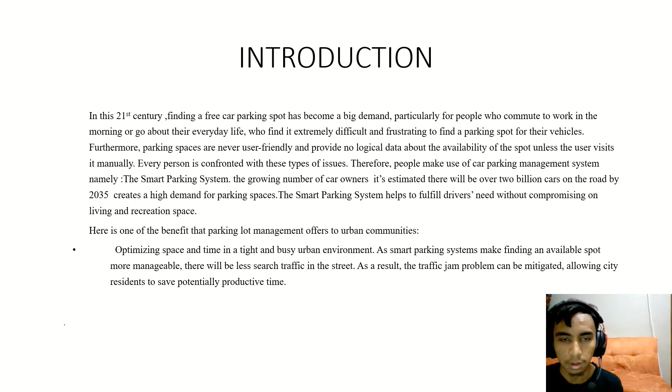Here is one of the benefits our parking system offers to urban communities. Firstly, optimizing space and time in a tight and busy urban environment. As a result, traffic jam problems can be mitigated, allowing city residents to save potentially productive time. This benefit helps reduce their time spent finding a parking spot, allowing them to save time getting to work early in the morning or at night.

For the next session, I will present our objectives for this project. Our first objective is to make the car parking system more efficient, as vehicle travel time and search time are significantly reduced due to the information provided by the smart parking system. Basically, the car parking system will alert and notify the user by providing information about free parking slots, making it easier for them to find one. This makes the system more efficient.

The second objective is to reduce manpower at the parking lot, so the parking can operate automatically while saving on manpower and energy use. Nowadays, most car parking lots are operated by people, which becomes a big problem as the parking lot consumes a lot of their time and energy. I believe with our project, the parking can operate more efficiently, reducing energy usage significantly.

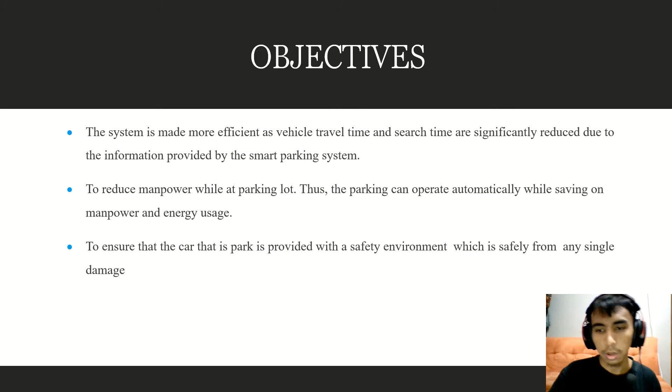The next thing I will share with you is the list of equipment. To implement this project, we need 2 proximity sensors, 2 barrier gates, and 2 light signs. For the next presentation, my friends Fawaz and Zulkarnain will explain a little more about our project.

Okay, next we go to safety in car parking. First, provide signboards in the parking area that guide users so that the flow of vehicles is orderly. With these signboards, traffic inside the car park becomes more systematic.

Next, make parking boxes with the proper size and distance, taking into account the distance between cars to facilitate the movement of users passing through on foot. This means providing proper parking boxes to give users a path to escape during an emergency.

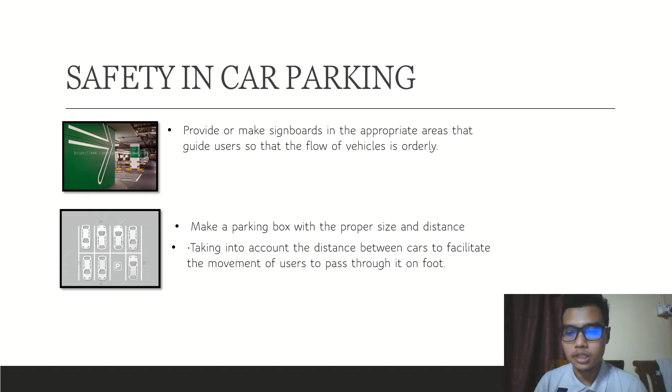Next, provide a strict security control system such as installing CCTV to monitor the level of security in the parking area, and make periodic monitoring of the security system. This is to provide strict security control in the car park area to prevent theft and other incidents.

Okay next, a technician should always be in the area when the system is operating. Provide an emergency button on the system to alert the technician for help so unwanted things don't happen. Provide fire equipment so that a fire disaster can be controlled immediately. This part is very important because it can save users' lives. A fire extinguisher is needed so users can control the fire first before waiting for help from the fire brigade, to prevent an explosion resulting from a car fire in the parking area.

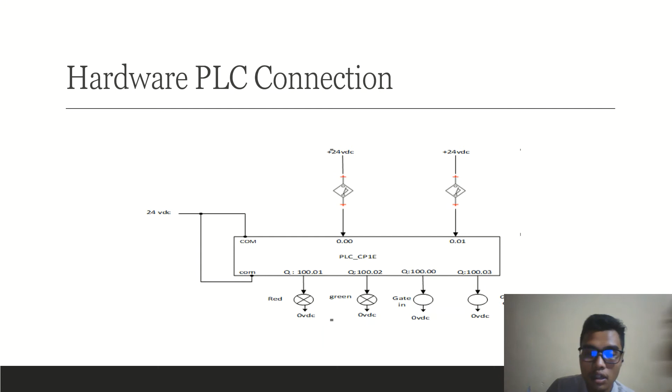My number matric is CN190048. Today I want to show how to run the simulation by using CX Programmer version 9.6.

Okay, so for our ladder diagram, before I run it, I just want to show the system that we built. This is sensor in for the car entry, and this is diff up.

Diff up shows that when the sensor is triggered, it will give a pulse and go to the increment. The increment we use is plus increment, which will add one each time, and this is our output that will be used as a gate. So when sensor in is triggered, the pulse will be given, the device will be active, and the gate will open.

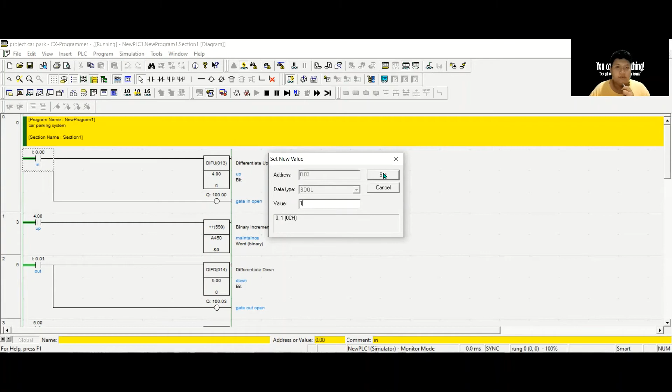Okay, so I give one, one for active high. I get active high for one. So the line shown in green is green. That means the voltage is true to the diff up and gives a pulse to the binary.

So when the car enters, the binary will count up one, from 0 to 1. So the gate is open. After the car passes through the sensor, it will be active low, and the gate will be closed.

But in the binary increment, there is only one count because only one car is entering. Okay, so in this system, the compare data is set to hashtag two.

This means only two cars can enter this parking lot. So when the car enters two times, the green indicator will be closed and the signal 'full' will be active.

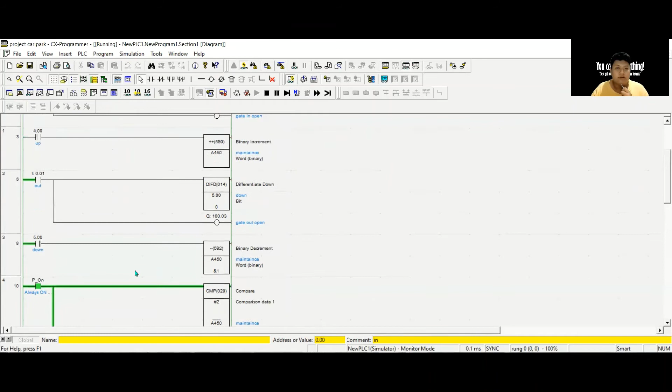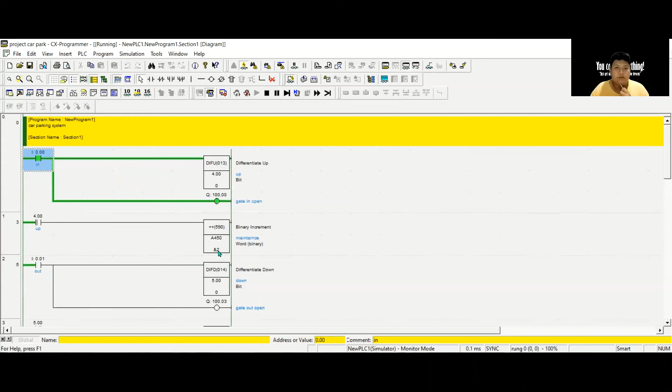Okay, so just now there was only one car, so I add another car, set to active high. So the pulse will be given again. So before this, one car, now two cars, and we go back to zero value for low voltage.

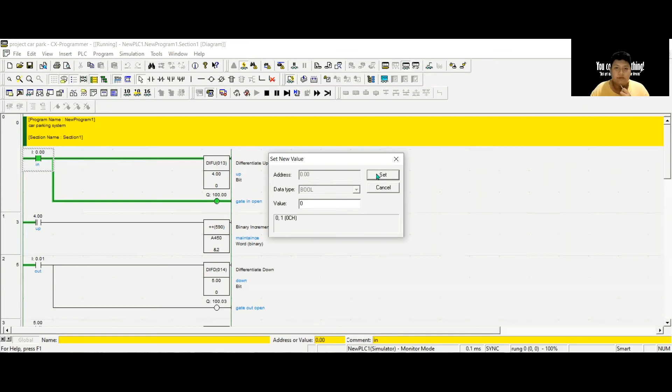Okay, so after two cars entry, as I mentioned, we set only two cars can enter the parking lot. So when the data compare, data one and data two compare, A450 has two counts, and they are reading the A450 data, two equal to two.

This means the equal data is equal, so the signal 'full' will be active and the 'available' indicator will be closed.

Okay, now I want to show you how the car sensor entry runs.

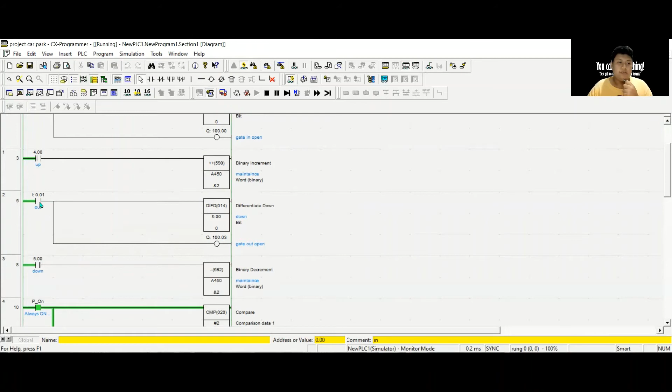After that, I will show you how sensor out runs. So just like sensor in, when the car wants to go out, the sensor out detects it.

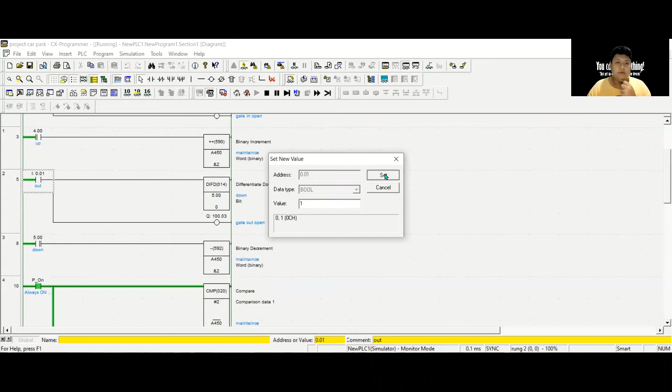Normally closed now. Okay, the gate will be open, but the number will not change into one because the sensor will detect after. Normally close, normally open, then will decrement into one. So after the car passes through the sensor...

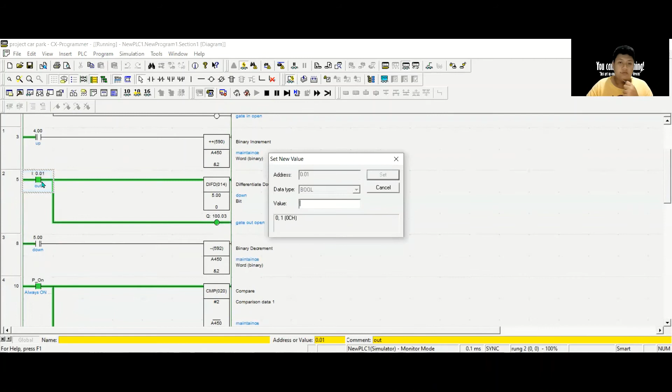The gate will be closed and the count will be decreased until 1. So just now before this there were 2 cars, and now 1 car is out, so the balance will be 1 car only.

So when the compare detect system detects not same, that's the reset. So that's hashtag 2, but only one is counted as 1 car only in the parking lot. So the signage full will be off but the available will be on.

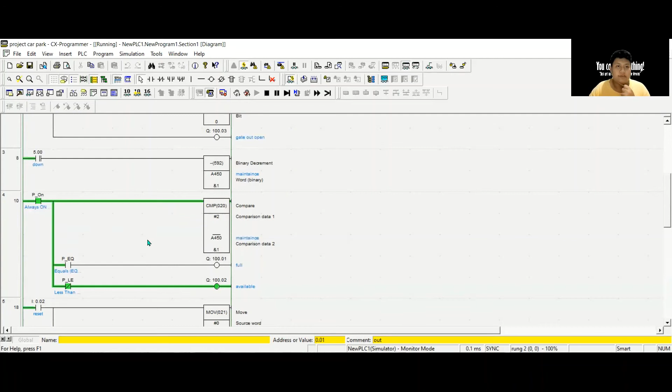So this is a button we use for maintenance if there's a problem with our system. When I push this button, all the system will be clear. So this one from 1 will become 0, and the data on this binary increment and decrement will be cleared also.

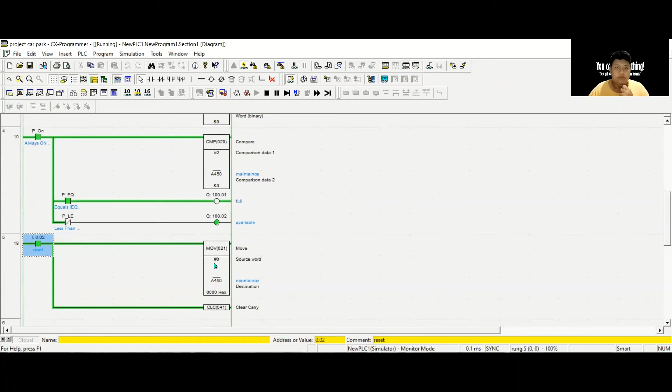Just say I push this button, high active, I set it. Then you see when this data move equals 0, we set the move vehicle data equal to 0, so all the data will be 0. If there's a car in the parking lot and we do maintenance, the data in the system will also count as 0.

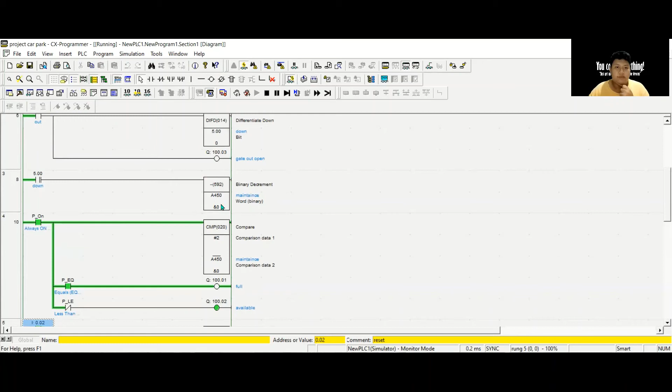So if we turn off the reset button, the system will run safely again, just like before.

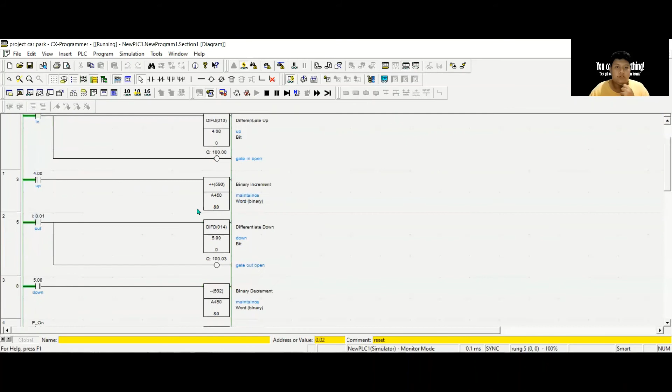So this one we just set up for 2 cars. If needed, the system can be changed into other numbers like 4, 3, up to whatever the system requires, or the available parking we create, to make the parking system easier to run.

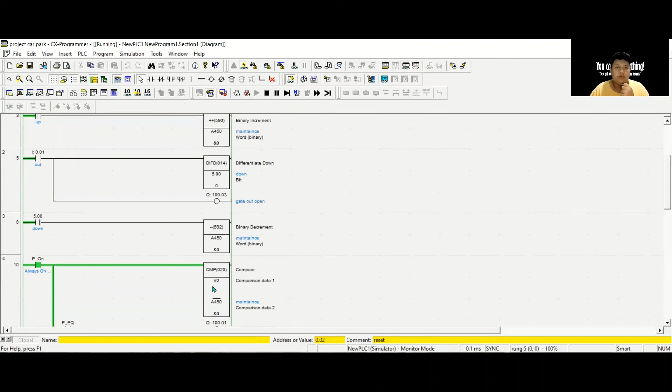I think that's all for me about running this simulation.

Okay, for this summary, the car system was built using PLC, which we call Omron CX Programmer version 9.6. It is suitable for this project and easy to transfer data from software to the hardware program. So for this project, we only run in simulation because the hardware and software are not combined.

But the target of this project is that when we transfer to the hardware, it will be the same system we need for the car parking system. So the target for designing this system is to make it easy for people to find parking and feel confident parking in our area.